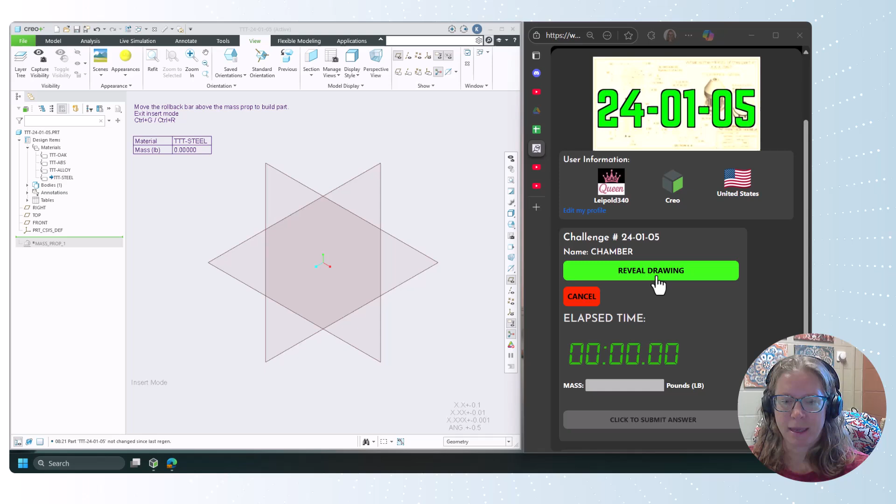And here we go, we're going to start with that revolve. So we're going to go in and revolve. I can't say it often enough, revolves in Creo can be just a little picky, so make sure you get that axis of revolution added in there right away. We're going to really focus in over here on... oh, that's not working. That's all right.

On this cross section, we've got this overall height of 6.25. It's interesting, we don't go all the way to the center.

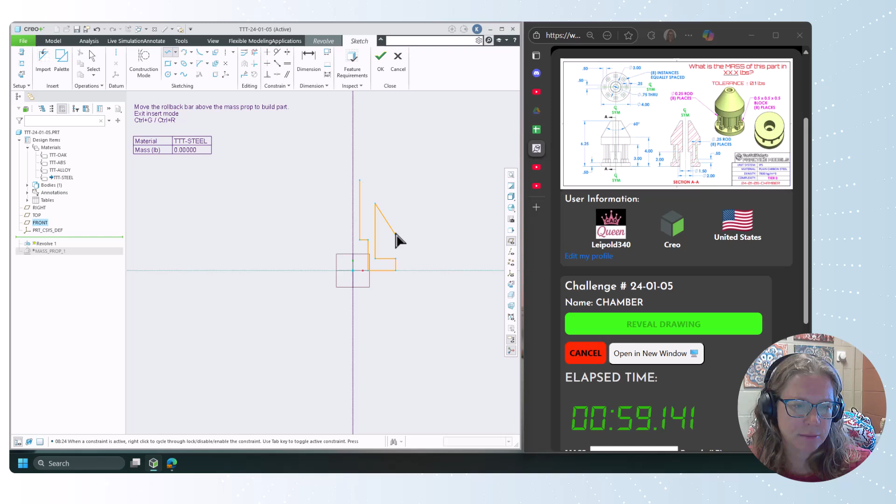All right, so we're going to start, come down, right, down, over, up, in. I'm trying to avoid some of those equal signs. I love the horizontals and verticals, but I don't necessarily want the same length, but I do want this one to be the same length. I don't want... you can kind of see where it pops up, and I'm trying to avoid it.

One of the hiccups with Creo revolves is if the same line on the center line is not one long line, that can be an issue. All right, so let's see here, where's a good number to start from?

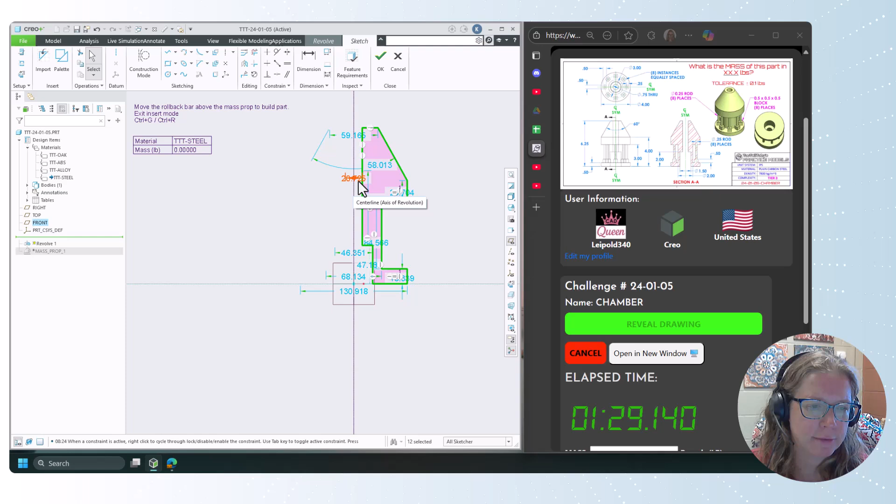The inside diameter is 0.75, so we're going to make this 0.75. My outer diameter, I'm not seeing here. The overall outer diameter is 4. Put that one on there. Let's add an overall height.

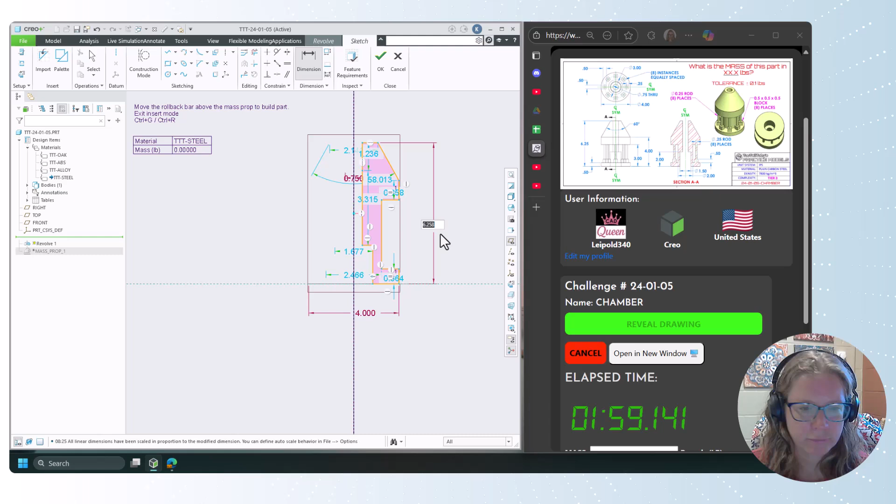Escape, that did not do the dimension I wanted. Let's try that again. Go. This height down here is 0.5.

This diameter is 2. This diameter is 1.5.

Let's see here. I can add that height of 2 in there. Let's get that one added in. Let's get the height of 3. Let's get the height of 4.

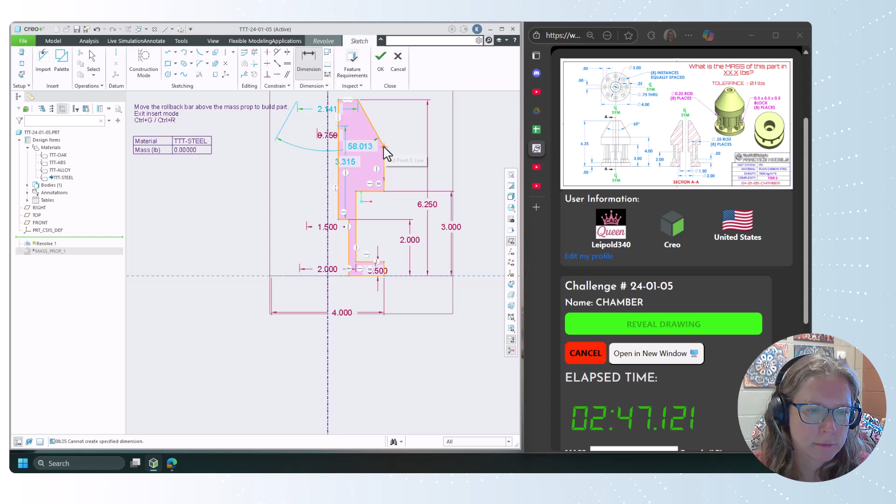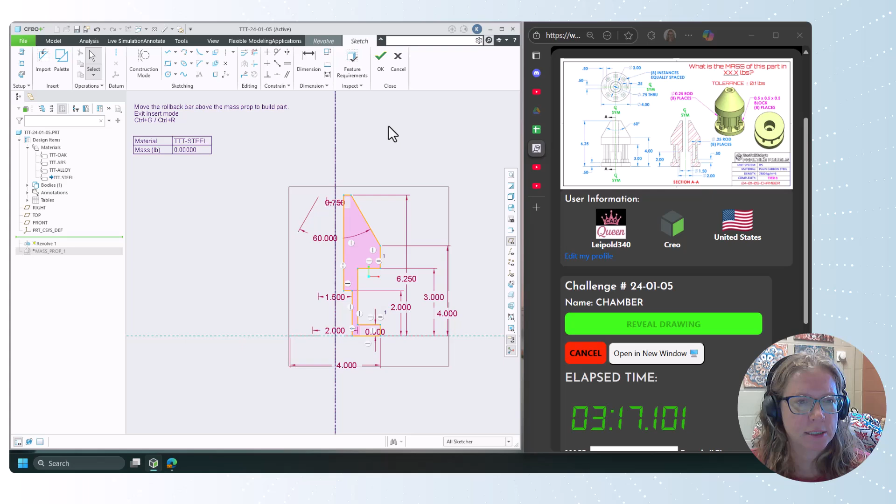What else? We need this angle of 60. Okay, and that last number, we really don't need that. So what I'm going to do, let's see if this works. I'm going to delete that piece and corner these two lines. Hopefully get rid of that last weak dimension, and there we go. Beautiful. Nice revolve.

Now we're going to work on these little posts and get those patterns. So let's make an extrude. Okay, and we're going to take advantage of the cap, so I'm looking right at that geometry. I guess I'm drawing the one in the back right now, and it's located on a circle.

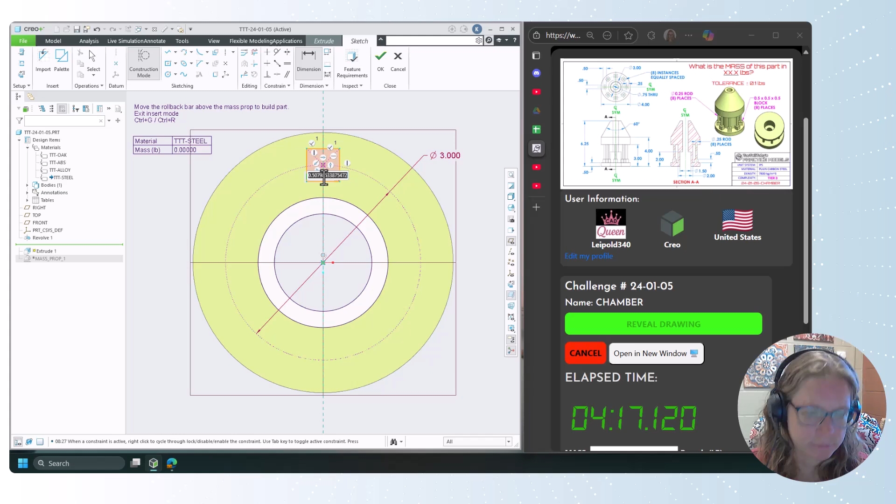So we're going to make this a construction circle. Usually when we dimension construction circles, it'll give us a radius. If we want it to be a diameter, the diameter 3, we can right click and switch it to a diameter. Give it 3. Okay, and that is a square of 0.5. I don't love how they show it as a square, but it is a square. So there's our first geometry. We're going to extrude that for a height of 0.5.

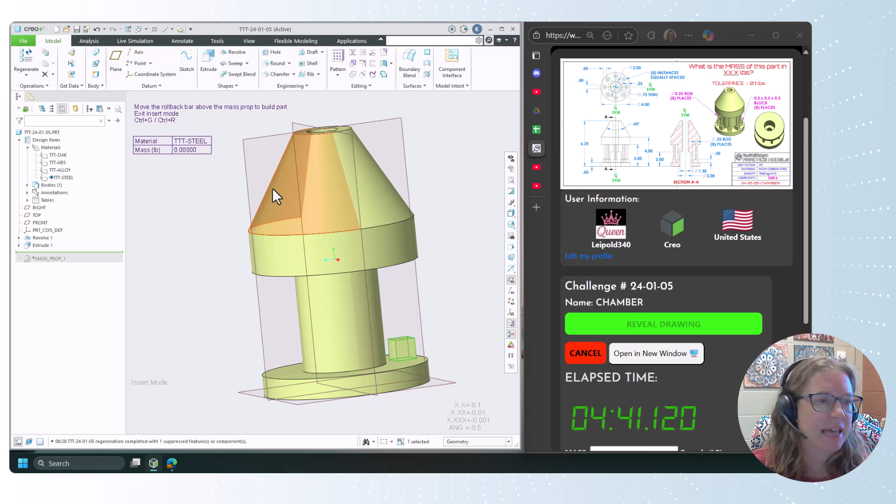Okay, there it is. Let's get that patterned - and not a dimension pattern, but an axial pattern. Let's turn on our datum axis. The axis has to exist in time before the geometry. There's going to be 8 of those, and they should be equally spaced.

So now I can go back in and extrude on the same shape, again with my cut there, make a circle. Let's see here, it doesn't look like it's showing where the center of that is, but it does look like we can dimension from the edge. That is giving us 0.25. Okay, and that diameter of that post is, I'm assuming it's 0.25. There it is, 0.25.

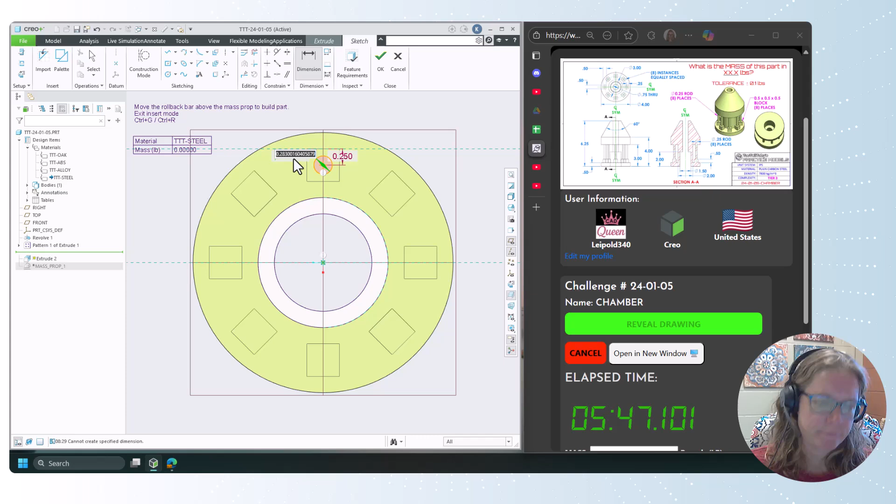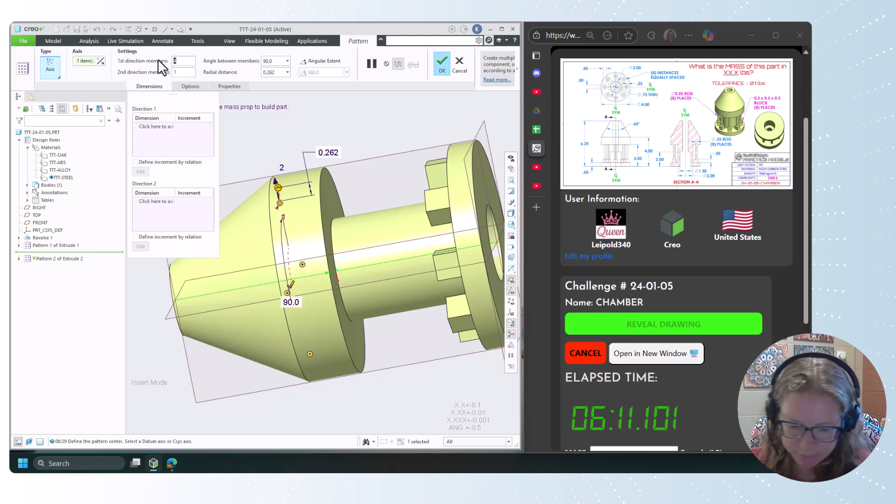Okay, and when this gets extruded, we're going to go up to next. Okay, and then we'll pattern that, and that'll give us... oh, I was hoping it would give me a reference pattern. That's all right, setting this to 8 is pretty easy. If you wanted to group them and pattern it once, you could. This is looking right, let's see how we did.

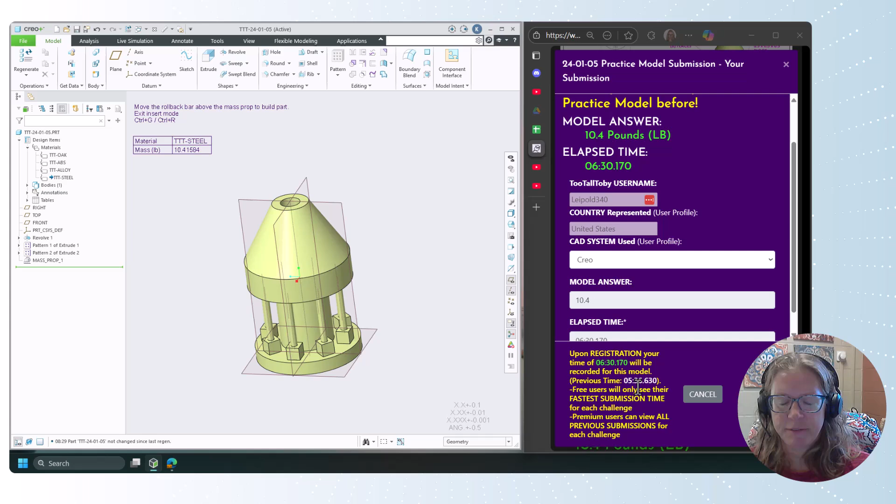10.4 pounds, beautiful. A little bit fast or slower than my previous fastest time, but revolves, dimensioning, patterning, axial patterning, and don't forget that clip to view option. Very nice. Okay, all right, take care.